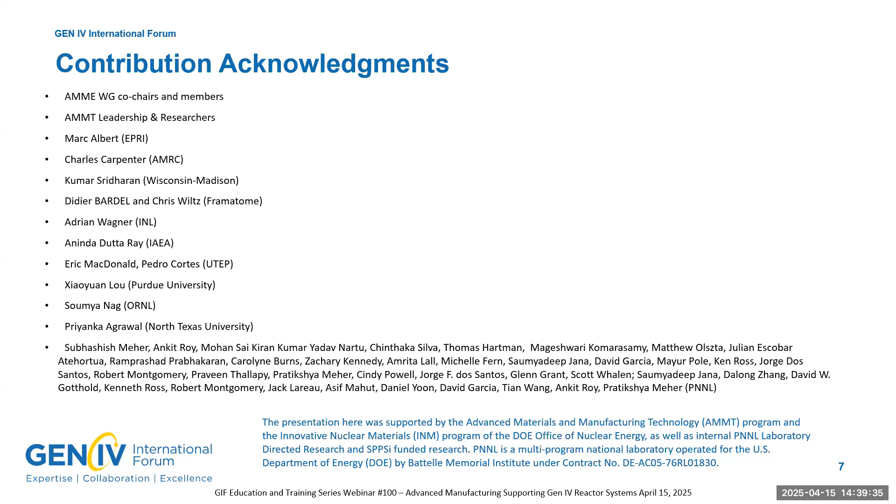There are many definitions for advanced manufacturing. However, it is really the use of innovative technologies to improve and optimize all aspects of the manufacturing process through the whole life cycle, from conception to end of life, with a goal to enhance efficiency, productivity, and competitiveness. It also involves how advanced technologies like robotics, automation, and data analytics are being integrated into traditional manufacturing processes. So we should not only focus on newer technologies, we must really look at the full envelope of manufacturing processes so that we can bring all the newer technologies there.

The US regulator is currently evaluating 5 advanced manufacturing techniques, classified as mature - and I put that in inverted commas, because there is still a lot of research and development, or at least deployment activities necessary from us as a community. Powder metallurgy, hot isostatic pressing (PM HIP), electron beam welding, and cold spray are so-called mature technologies.

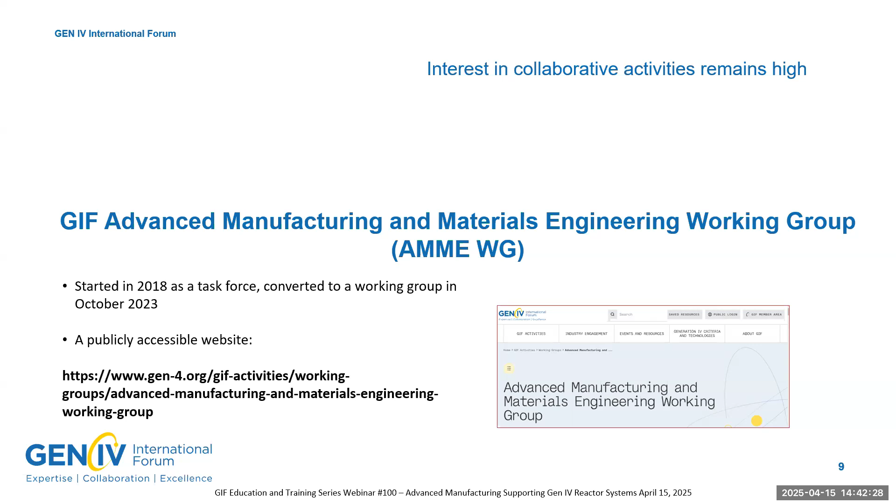A little bit of history of us: we started in 2018 as a task force, and we are very happy to say that we converted to a working group in October 2023. Today I'm going to give you a snapshot about what we are doing over there.

I'm not going to read through this long list of our members. However, it is very important for our global community to understand that we have 17 country representatives, and each one of you can reach out to your country representative to understand how you can become involved and how you can contribute.

Our main overarching objective is to reduce the time to deployment for advanced manufacturing and materials engineering technology. Specifically, we aim to promote international collaboration on the qualification of these processes, because together we can be quicker and faster and better. And that is what we are aiming to do here.

We are frequently meeting, and we are happy to say that in addition to the country representatives, we are open to observers from industry. We are extremely happy to say, as you can see on the slide, that we do have some industry observers available nearly every month in our discussions and meetings, and even ad hoc conversations in between those meetings.

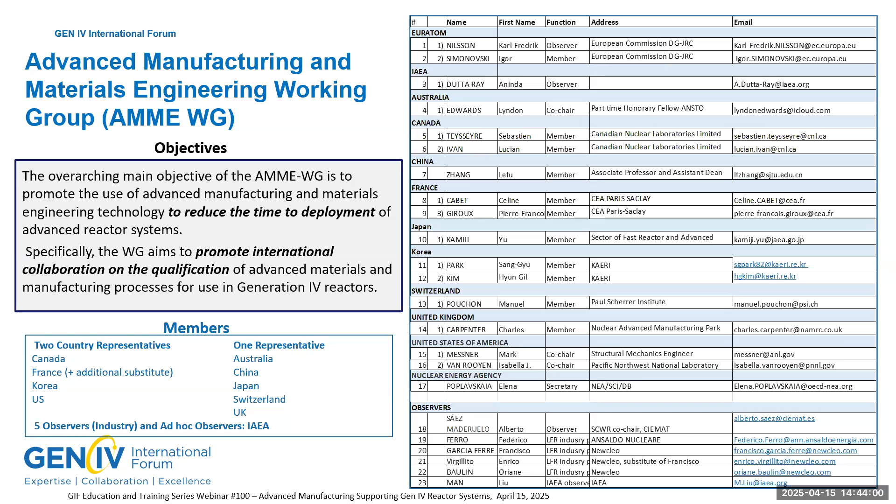Very excited about the activity and action of our teams. Now, how do we do our work here? It is not funded projects in the sense that we are providing funding, but each country contributes to the knowledge base, working together toward higher value added. With that, we have divided into 4 task groups, and we have 3 co-chairs: myself, Mark Messner, and Lyndon Edwards.

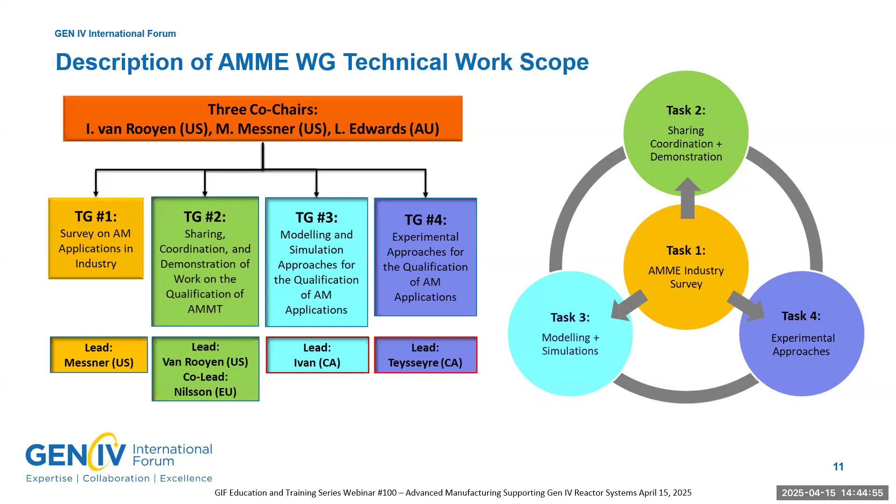Task 1 is the industry survey, because we are here to serve the industry, to help the industry, and to do priority work, what is important for them. Very importantly, we have done 3 surveys already through the task force time and the working group time. The industry behavior really changed, I think in 6 years, from reactive to proactive.

Very excited to see that industry are joining hands with all of us and understand or experience the urgency, and therefore we need to go further.

So what materials are they interested in? Steels, or iron-based materials, are still the highest interest, and they are focusing more on traditional engineering materials for a variety of reasons, because more information is available, more material, more supply chain is available, and therefore the risks are perceived to be lower. However, the interest in ceramics seems to be increasing relative to metals, but metals are still by far the most interesting topic.

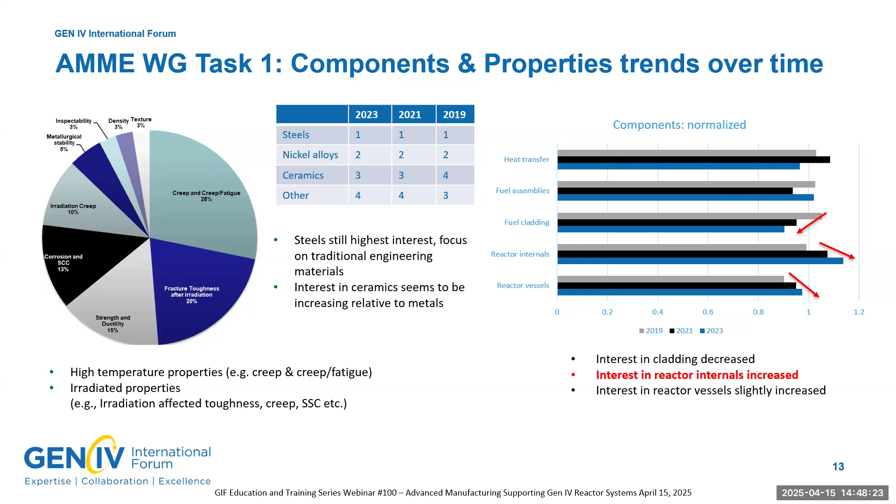We have also seen a slight change in the components that industry partners are interested in, with reactor internals becoming of higher interest. The interest in cladding decreased, but it may be an artifact because the community is starting to understand that this specific working group of ours is not focusing on the fuel meat itself, the actinide type of manufacturing. So it may be an artifact, but we don't have enough data to confirm that, so I think it is not at this moment a real big surprise.

However, we also see a big change if we look at the manufacturing techniques that the industry stakeholders are interested in. You can look at the blue bars here, and I've highlighted the three biggest changes with the yellow block. That shows that directed energy deposition processes have received a drastic increase of interest, as well as PM HIP, and advanced welding, which from day one, when we started these surveys, was the highest interest. All this shows the possible trend toward large-scale manufacturing and integration of systems.

So really, industry now wants to construct, fabricate, and build the systems. It is not only anymore on the component or material level, showing that it is really an earnest need for us to look at the full life cycle of that material.

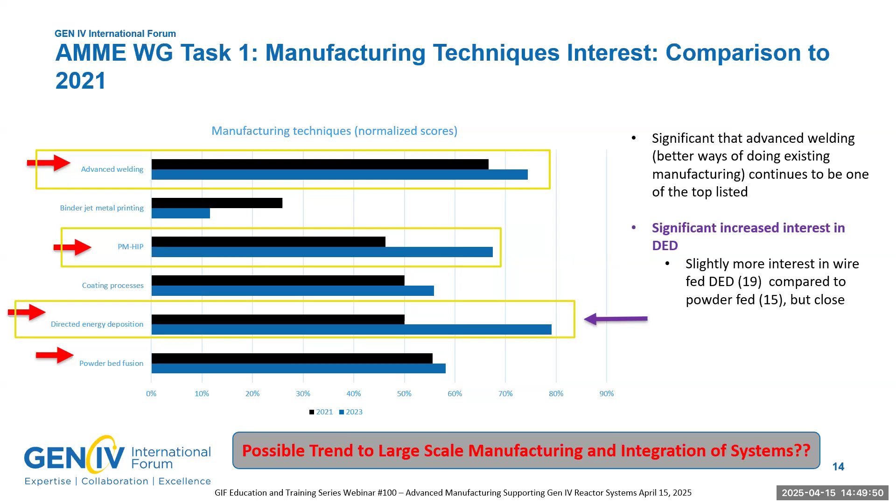A little bit on the directed energy deposition processes - it includes both wire-fed DED as well as powder-fed DED, because each one has a specific niche of components that we can do.

Now, let us talk a little further on how the information we have received from task 1, the industry surveys, is feeding into tasks 2, 3, and 4. Task 2's main objective is the sharing, coordinating, and demonstration of our work on qualification, because it doesn't help if we are all excited about our topical area but we are not showing the world what we are doing so that it can be useful for them. It doesn't matter if it is in research and development or what technology readiness level you are at or what level of commercialization you are at.

Our purpose here is to share what we have available globally together. There are specific activities there. I'm not going to work through that now in this presentation, but you are welcome to reach out to us for further discussion. We do have a specific technical task aimed at the feedstock powder, and we will get very soon into that activity.

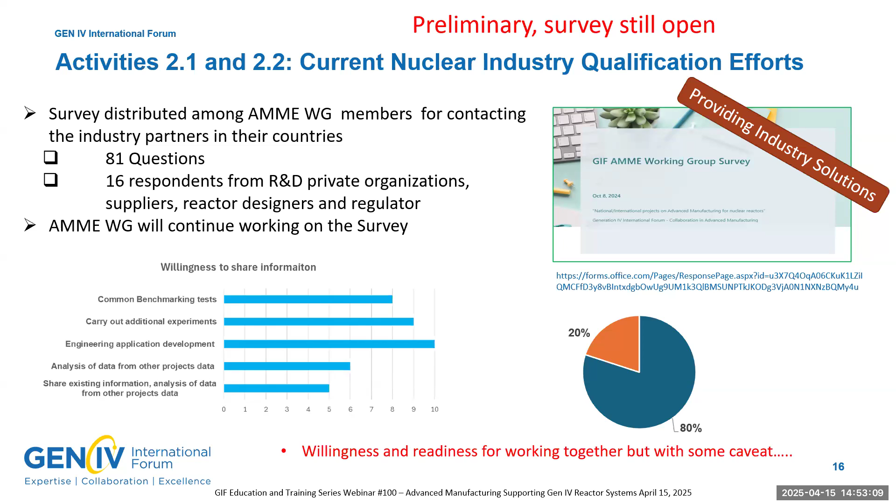I have not included all the information we've received, but significantly, most companies are working on material and component manufacturing, and the testing technique used is the standard test. There is some accelerated testing done, but because of the risk, time for development, and urgency, focus is on the standard test. That opens up the need and opportunity for the research and development community to focus on accelerated testing methodology and get it into the codes and standards.

On the qualification approaches, predominantly just a little ahead of the model-based and statistical test method is still the equivalence-based approach, still equivalent to our more conventional manufacturing methods. That is not wrong, however it shows the tendency that we are still not designing for the newer techniques. Hopefully in time we will get to that point so we can fully reach the benefit of that.

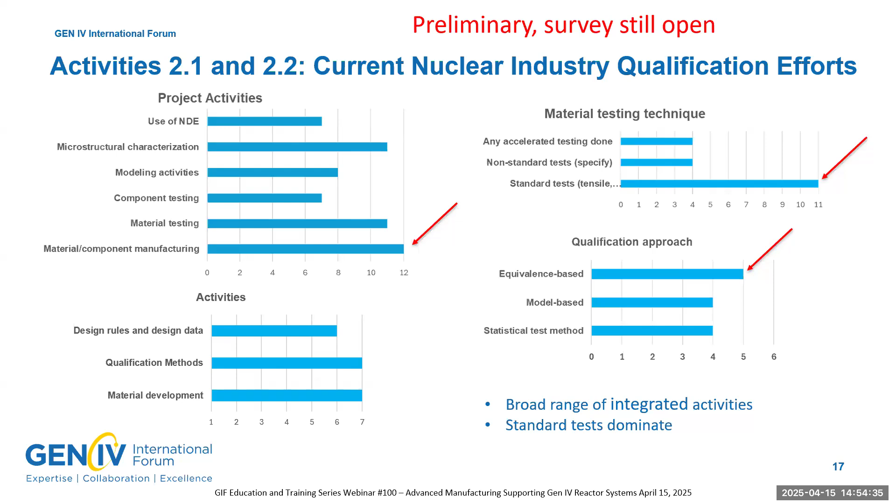As part of our obtaining and learning from other industries, part of task 2, we had this additive manufacturing industry perspective panel during the recent TMS, where we covered aerospace manufacturing as well as nuclear providers and developers. All of them had similar needs—not concerns, but similar needs. It doesn't matter which industry we are in, we can join hands and learn from other industries, and then just address the specific, unique opportunities that nuclear brings us.

I am willing to share some more input on that. We haven't written our report yet.

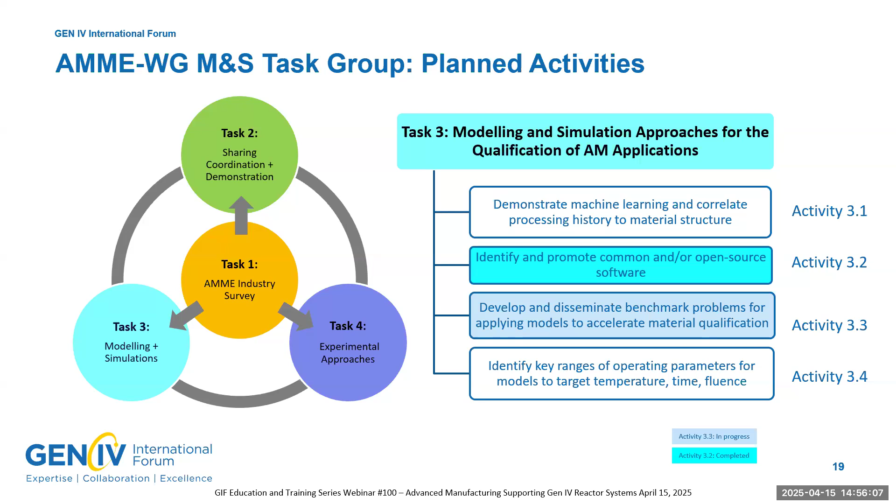Task 3 is modeling and simulation approaches for the qualification. How can we use modeling and simulation to accelerate qualification, or at least validate, or decrease the number of experiments? So really understanding what open source software is out there, and how we can apply these to accelerate manufacturing qualification.

The team has done excellent work. Currently it's only an Excel-based database, and we are busy testing it internally in our working group. But as we grow in maturity, we are willing to make this available, covering a variety of manufacturing processes, with use filters, availability, and detailed references.

One part of this work will be presented by our Canada member, Lucian Ivan, at the coming June 3rd to 5th at the US Nuclear Regulatory Headquarters in Rockville, on technical approaches for qualification and through-life performance. So this will be our test case, and from there we hope to do further benchmarks going forward.

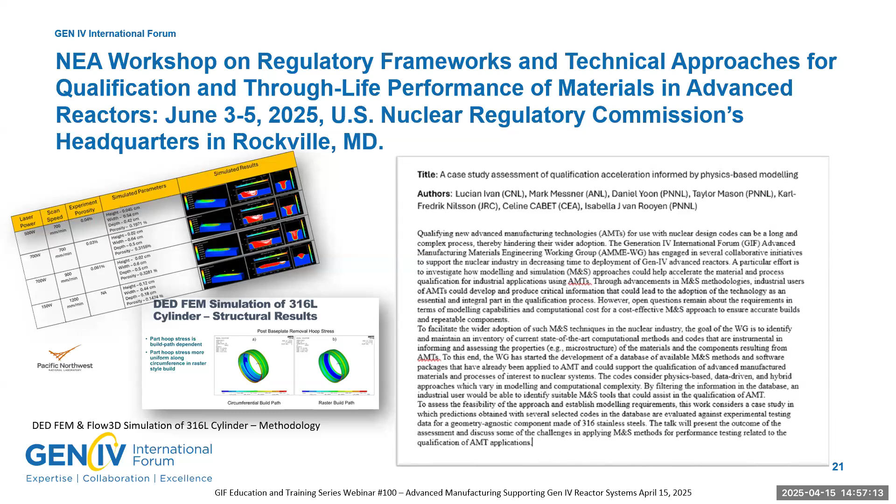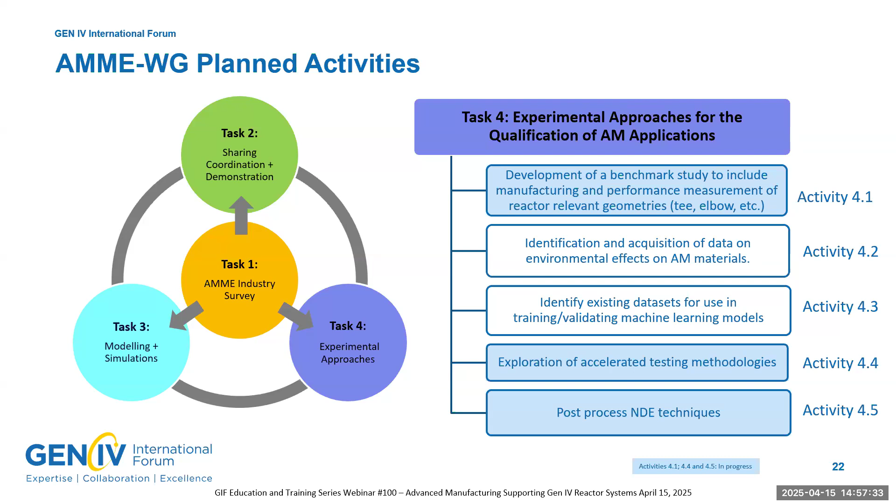Now task 4 is the experimental approaches, and obviously we want to understand from our survey what we need to focus on, and how do we link it with our modeling, and what data is already available within our members that we can further continue with.

So to overcome possible proprietary constraints, we have designed a potential expanded elbow geometry benchmark design, as it provides opportunity for pipe sections at different angles to be built. As a case study, we are focusing again on 316 variants, as that is identified as the material type used by many material developers.

And we will look at powder DED, laser powder bed fusion, and possibly wire DED to a lesser extent. Later on, we would like to expand it into nickel alloys as well. And yes, you would say it's really not the most fancy geometry.

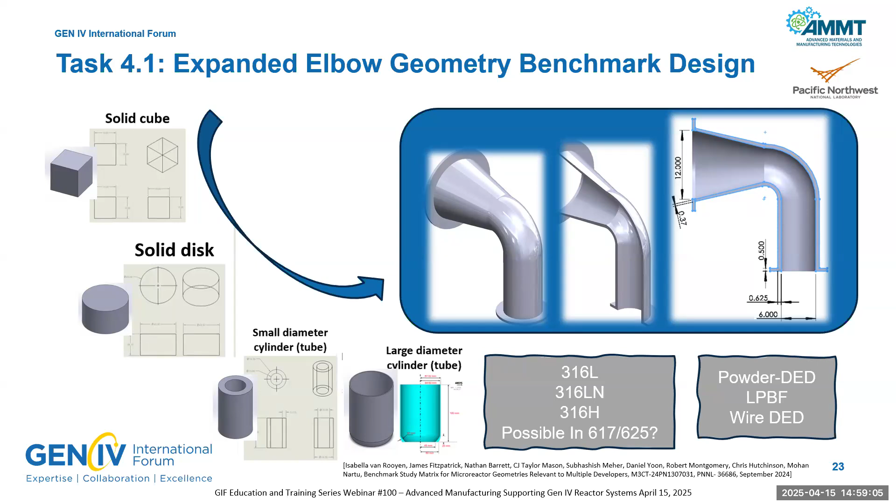That is an advantage of additive manufacturing. However, this is one aspect that we think most industry partners and developers will use: some tubes and piping of sorts, both in-core and out-of-core. And that's why this is quite challenging. It looks simple, but it's quite challenging to build in the different processes.

Now, a lot of work has been done, but just some highlights - I have not even included all the countries' contributions here - but some builds were already made in geometry, and a benchmark study and sharing of information is now in process. You can see for each material type at the bottom, we will develop a shared benchmark study. There is already some country reporting on the geometries, how we decided, and obviously some modeling has been done, very early stage modeling as well as characterization.

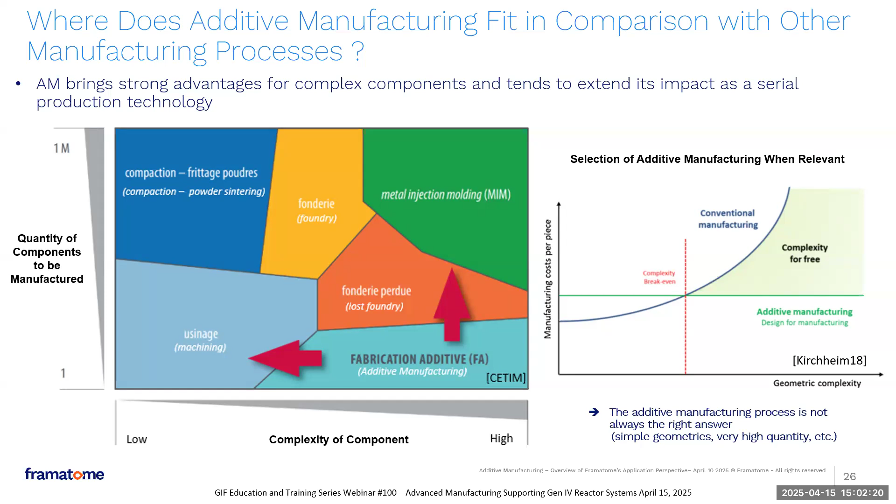Moving forward, here you can see from their perspective and industry's perspective that there is a variety of additive manufacturing processes. And for each one of us now to decide what we are going to do, why we need to do it, we really need to understand the property-manufacturing relationship. In other words, what is your end product's requirement? And then, by having the technology knowledge of these processes, what will work well for you.

And this is what Framatome did, focusing here on, well, what is it, two, four, six, seven manufacturing processes. I'm sure by now you have started to hear a lot of the same terminology. So WAAM, for example, is wire arc additive manufacturing, or otherwise similar to wire DED - slightly different technologies, but falling in the same family.

Then there is also plasma arc transfer, which is a layering process, similar to cold spray, and then hot isostatic pressing. Here you can see again the effect of geometry complexity versus size, with hot isostatic pressing, WAAM, and cold spray more listed in their evaluation for their actual needs. And also, on the right-hand side, you can see the enormous primary circuit elbow, and then also the need for multi-material assembly. We have a few examples of that going forward.

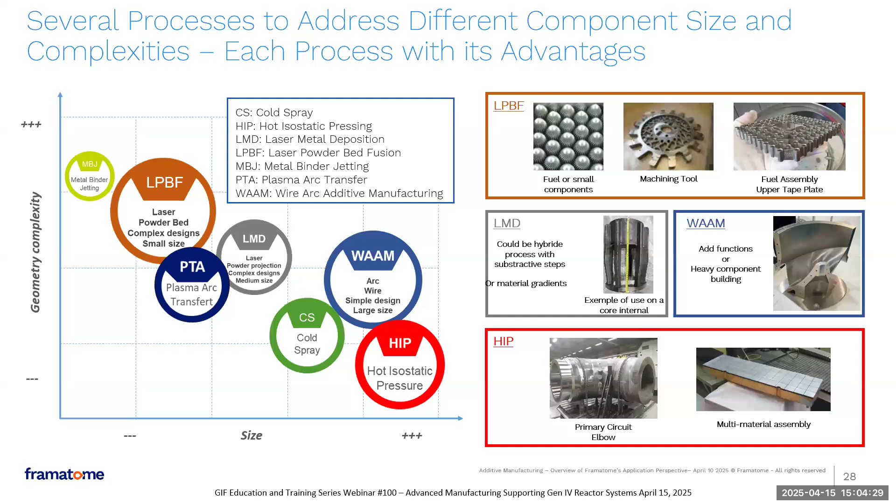With this, they have decided that their current interest is on laser powder bed fusion for their specific needs currently.

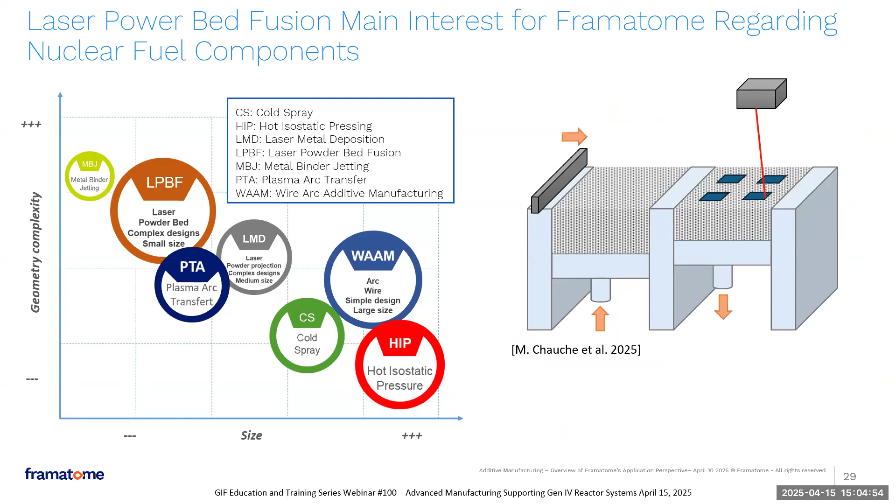Okay, there's a little simulation there, so thank you very much. I'm sure some of you know this already. And with that, then we are moving to the joining and welding technologies. I think I must work a little bit faster here.

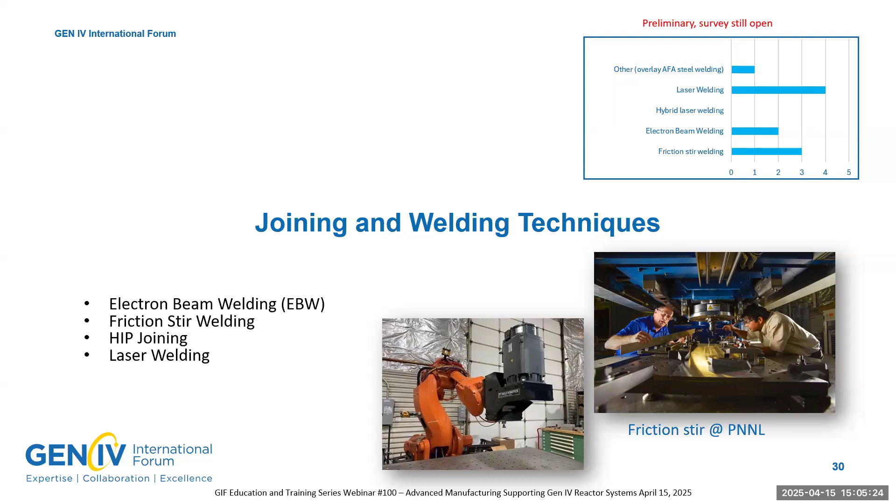Again, if we look at the preliminary survey of task 2, it shows that laser welding, friction stir welding, and electron beam welding are of interest to the respondents up till now, and therefore we will give some information on these. Now, electron beam welding can really make very high integrity components and also extremely large components as well.

And EPRI together with AMRC really did very good work on this section welding, and they used the NuScale Power project, and it was a US DOE project managed by the AMMT program.

So I forget now the actual decrease in welding time when they switched from gas TIG welding through to electron beam welding, in addition to all the other technical aspects. But it is tremendous. It is from months to days. So it is extremely important to understand the size of your component, your integrity, and obviously your equipment available.

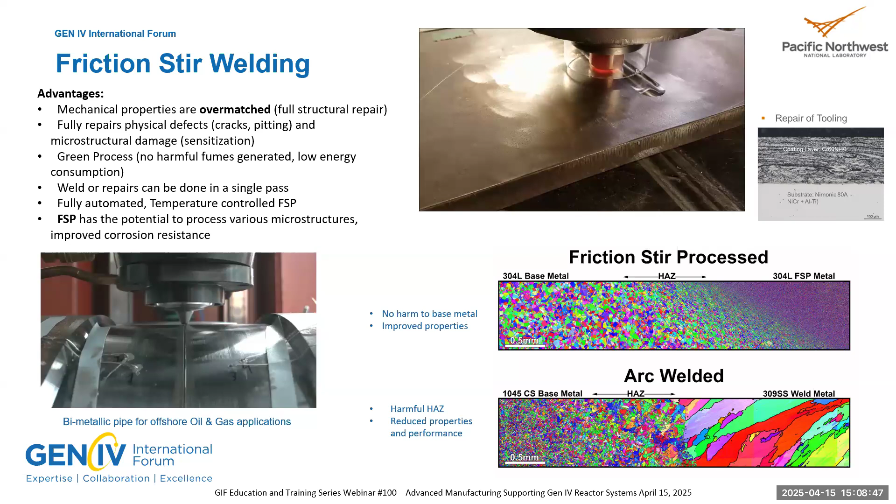Now, friction stir welding can also potentially be autogeneous - don't need any filler materials. The video is running in the background there. And on the right-hand side, we can also understand and see the metallographic differences. It can be very much automated as well, for both lengthwise axial and circumferential welds.

This is actual work that has been done at PNNL and many other places can do that as well. But the benefit really can be seen that there is no harm to the base metal, and it does have improved properties. Also, weld repairs can be done in a single pass, fully automated, you can control it very much, and then you can have various options.

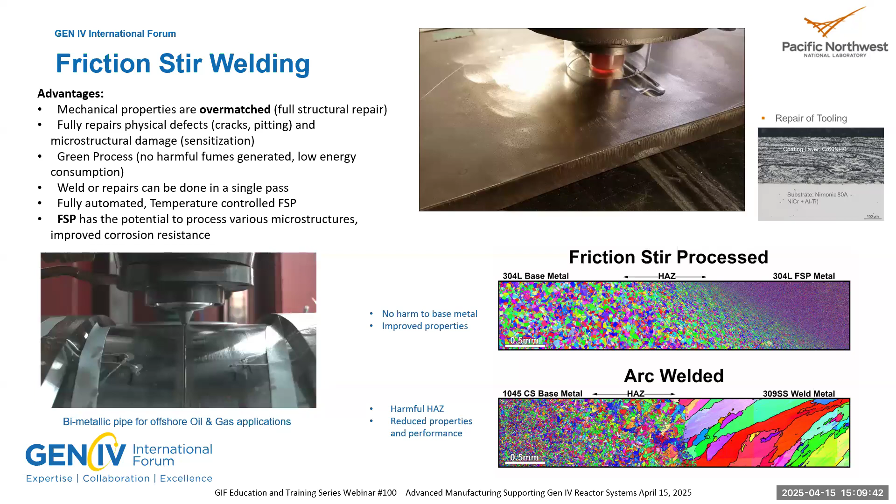Okay, let's focus here on contributions from Purdue University, where they really have a very interesting research project with very nice future applications. It is a combined project showing hot isostatic press as a joining technology, as well as cladding technologies, or the effect of cold spray clad and then HIP capsule diffusion bond. So a variety of joining technologies. It's quite a busy slide here.

However, the biggest information we want to get here is that we do not need to limit ourselves on what joining techniques are available, and we must think about how we can integrate a lot of manufacturing processes together. We can also do graded joining by HIP, as they used in this case study with SA508, different material manufacturing types, but also with different manufacturing types as I mentioned above. And here is some microstructural advantage on the step-by-step approach.

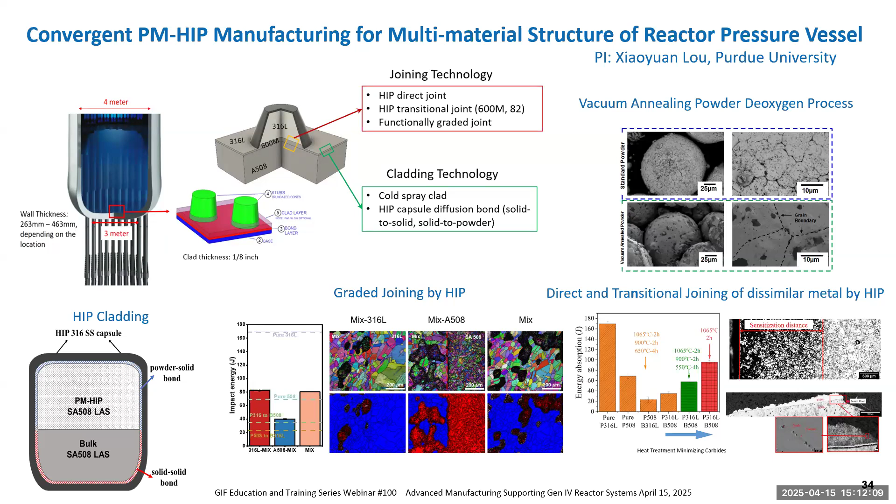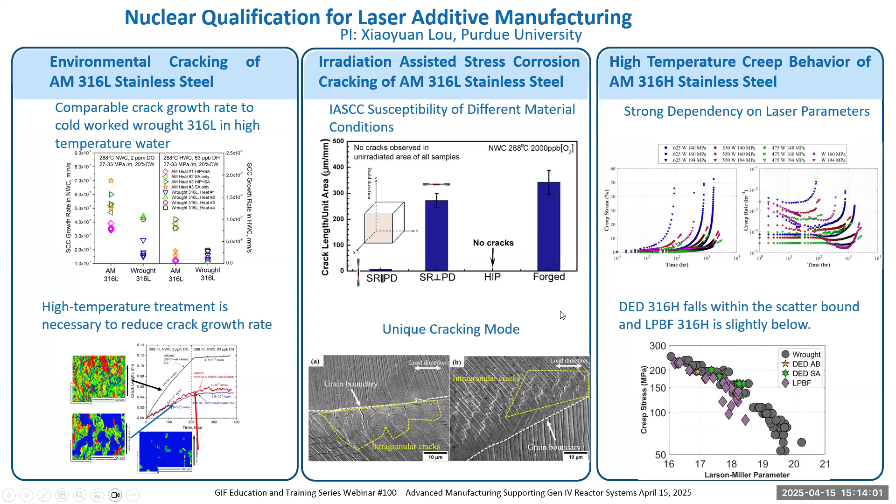So in other words, we are very close to understanding, or on the road to understanding, what is happening, and also once you have welded the material, what is the effect on the corrosion resistance? How does that influence it? Because it is not only the one parameter or property we need to combine, but multiple properties we need to consider.

Now, for large-scale manufacturing, I've already talked about hot isostatic press, but we must not forget other manufacturing techniques, including forging. I have not included this, but there is still a very large place for conventional manufacturing methods. We are not replacing them at all, and we need to understand where we are going.

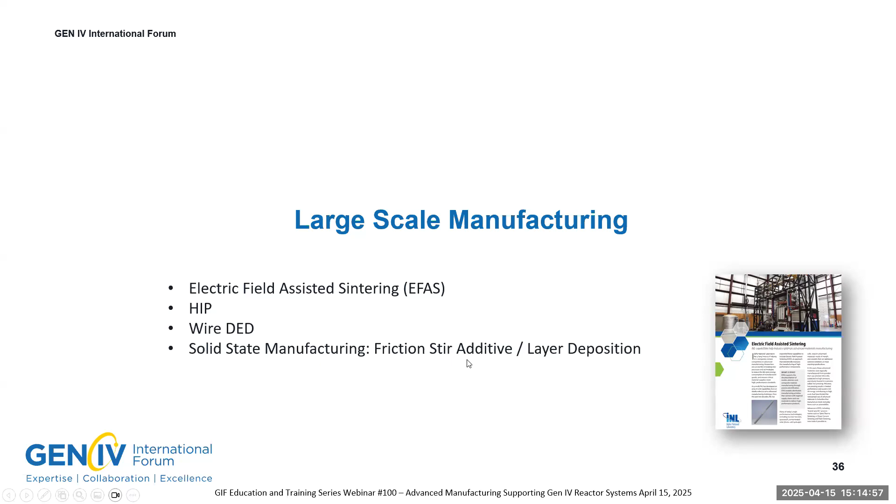But I want to highlight electric field assisted sintering, because maybe not many of you know of the large facilities already available, since many of us just think of it on the laboratory scale. However, there is commercial scale available, and I will provide some information. I will also give you more information about friction stir additive or layer deposition processes here.

So INL has a very nice system, a large format 800-ton press that can provide sample sizes from 8 to 24 in diameter. I urge you to read more on their website about their facilities. This is also a sinter process that is more energy efficient, so it is something for us to consider using in the future.

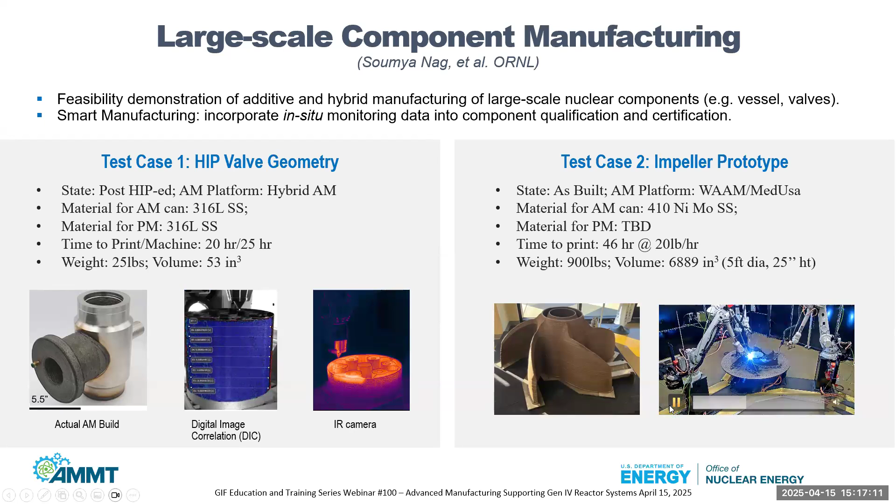Okay, with this, let me move on. I know there are too many nice videos for us to look at, but now let us look again at friction stir additive. Friction stir is a solid phase manufacturing process, and it can also be used for bulk manufacturing.

Here is an example of a specific high entropy alloy of very high strength, which we have done for the first time using this technique. The solid phase manufacturing process applies high shear strain during metal synthesis or fabrication, and it produces high performance microstructures, semi-finished products, or engineering assemblies without bulk melting of the materials. This is important because now we can potentially have a different manufacturing process for materials that were very difficult to manufacture before, or that have problems with segregation during casting or the melting profile.

Generally, additive solid phase manufacturing is focused on three solid phase deposition technologies. The first is friction surfacing; you will see quite a number of terms in the literature, and we try to simplify it here. Then there is friction melt, which uses the tool shoulder and is more effective for layering and depositioning, among other things, but is otherwise fairly similar to friction surfacing. And then you have friction stir plate stacking: if you are in the field or have plate supply available, you can build your bulk material up and still have quite interesting features, as shown in those examples.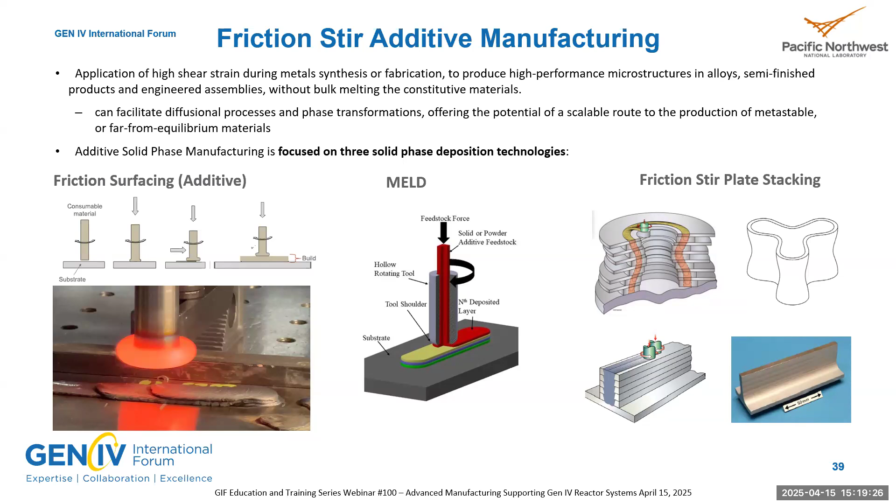Okay, let me move on. Here is early research on high entropy alloys. With high entropy alloys, as you may know, many applications and market entries are limited because of the lack of a bulk manufacturing method. We have started research using friction stir layer deposition on the microstructures of these alloys, because in addition to microstructural advances like significant grain refinement, it is also possible to make bulk material of the HEA, which we hope will bring it closer to demonstration and application. Here are the two material types that we have utilized.

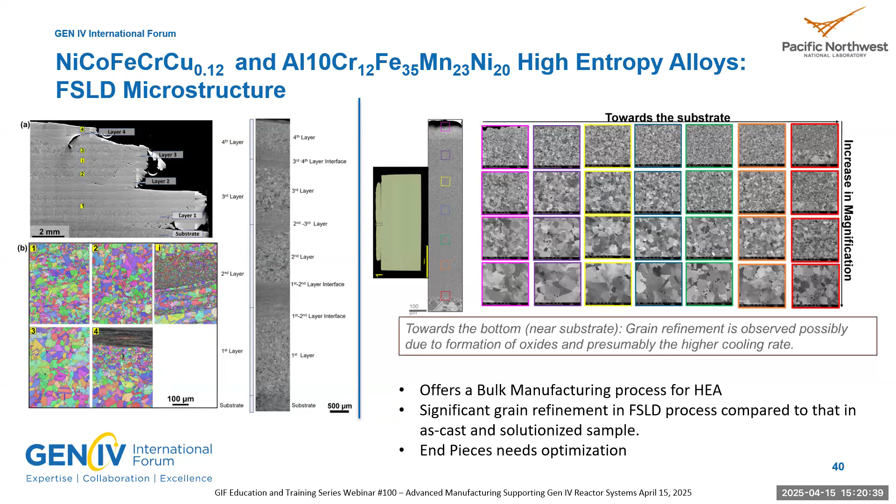Both alloys have been indicated in other literature as potential candidates for use in nuclear energy. Excellent work here from Dr. Agrawal from UNT, North Texas University, showing—and the reason I show this here is that although we have discussed a lot of manufacturing technologies, not all the knowledge is there already on their radiation tolerance behavior.

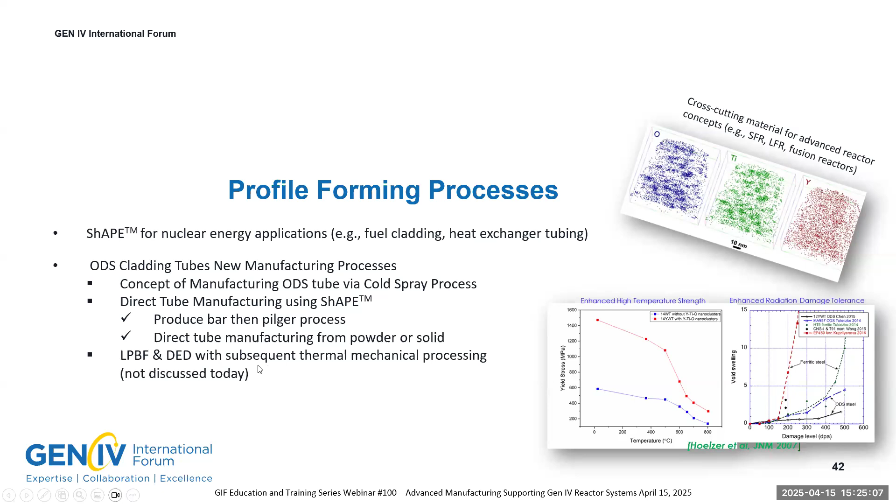Really, one or more of these can be more economic, viable, and repeatable, so that it can be qualified. I am not discussing the additive version of the work that the AMMT program is doing specifically—we'll leave that for a different time.

It is too much. So the ShAPE, as I mentioned, is developed at PNNL, and it is a solid phase manufacturing process—shear assisted processing and extrusion process.

There is a little video showing a rotating die pushed into the billet material, resulting in the fabrication of extrudate between the mandrel and the orifice, or the landing. There is a variety of designs, a variety of materials, and in all the tooling design there is a big material component as well.

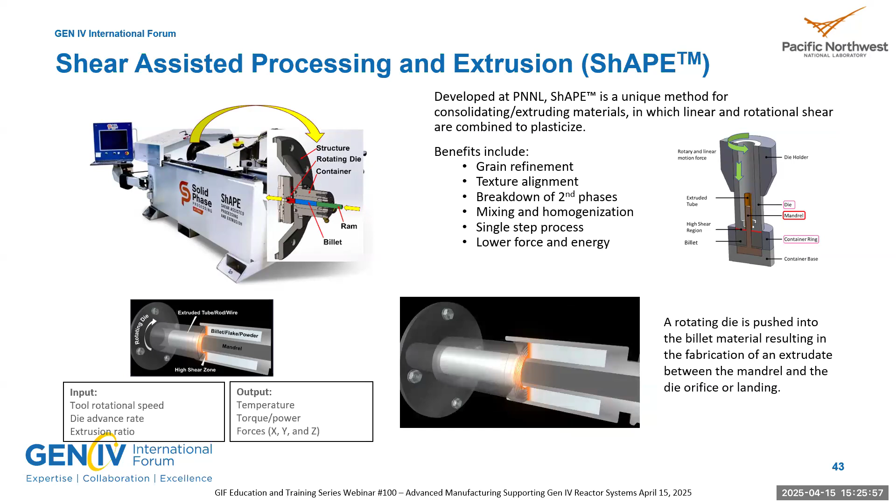This allows an opportunity for a variety of profiles—not only round tubing, but also square, asymmetric, multi-cell. Obviously not all material types have reached the same technology readiness level, but we are working on higher strength, higher temperature materials as we go along. It was initially developed for the automotive industry, and we are glad we can transition into higher strength and higher temperature materials as well.

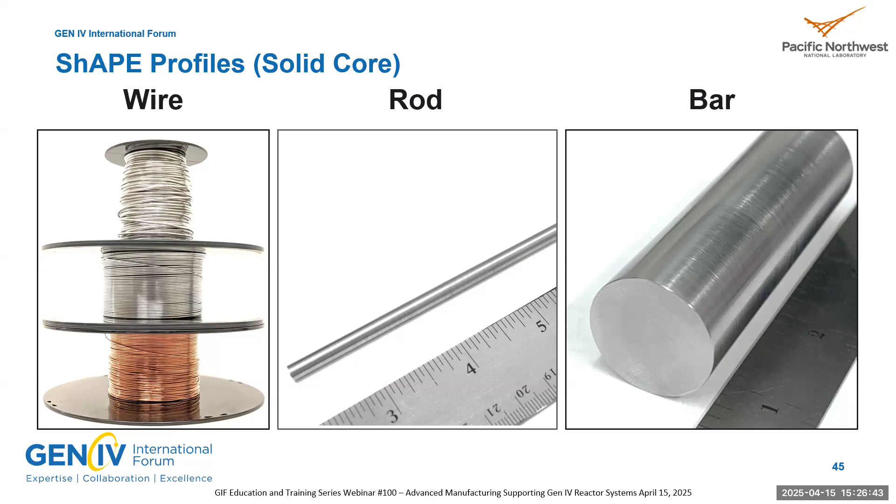You can see here you can do wire, rod, and bar, which also provides opportunity. Of all the research, I wanted to highlight this because it's relevant to nuclear energy, with zircaloy tubing. It was LDRD work, but it also shows the possibility that you can have cladding simultaneously inside or outside, or both.

And have very good equal thickness. We have done more work now on ODS materials for direct tubing. I have not included it here, but our paper is in the final stages of review, addressing this, so that information will be available soon. However, here again you can see the difference in grain sizes from before and after—a significant grain refinement—which provides a very good opportunity.

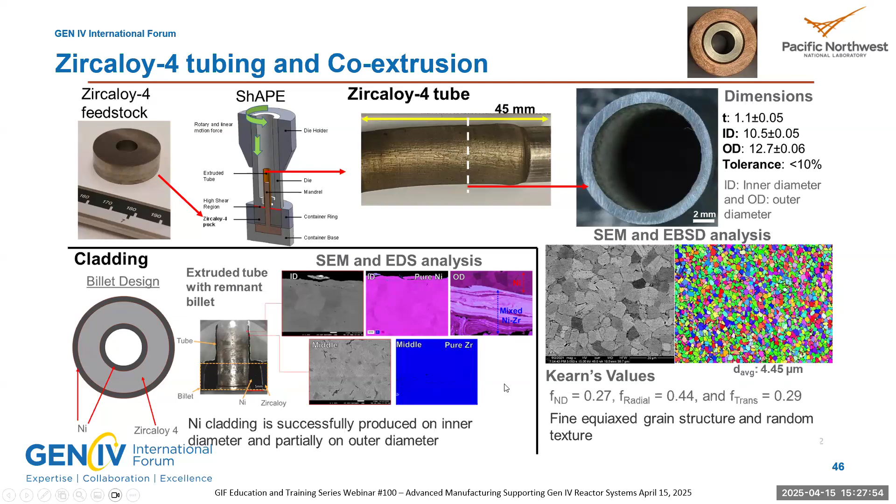We are currently busy with other HEA alloy work for fuel cladding, very exciting work. Now, why do we look at other manufacturing methods for ODS specifically? That is because there is such a lengthy conventional manufacturing process. It is working, but we really want to be more cost effective.

There is a high cost, and there are so many parameters that we need to monitor to be able to go through this process, that we really want to explore some more commercial processes.

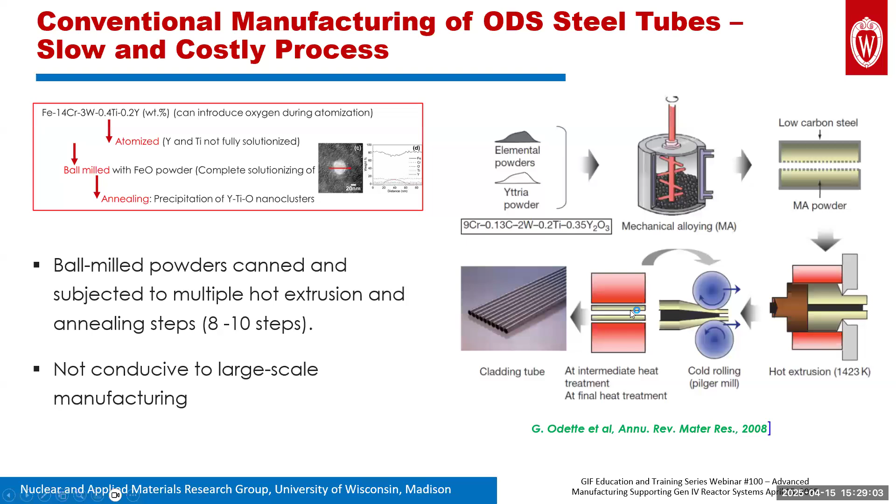Some of the ShAPE processes can eliminate steps until here and still do pilgering when you have the bar, and then the pilgering, or if you can do directly from powder into your tube manufacturing process, as I showed in the previous slide.

Very exciting as well is this patented process from University of Wisconsin-Madison, where they have again eliminated multiple extrusion steps, making use of cold spray, where they use a sacrificial or removal substrate, and then do a thermal treatment of the freestanding monolithic ODS cladding.

This is exciting work. It started from a university program funded by the Office of Nuclear Energy, and it is very exciting. Obviously, there's a lot of science and engineering involved, and I did not show everything here, but it's very nicely written down in some of the references.

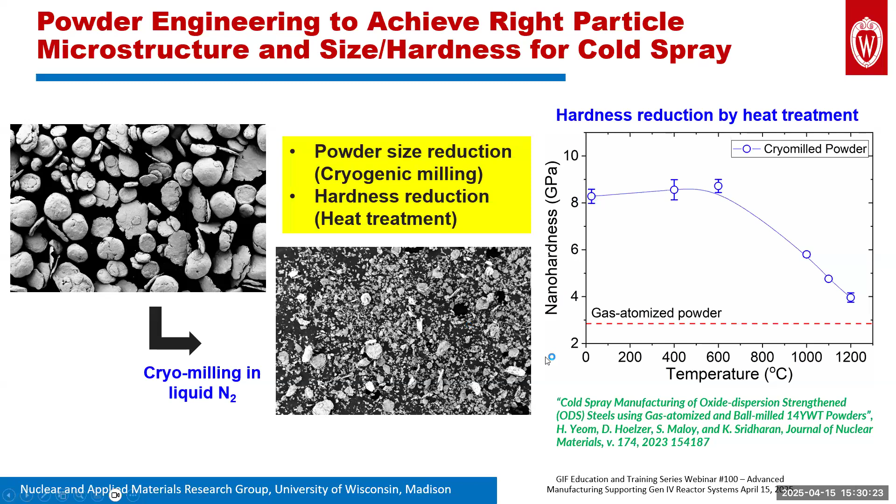Because you need deformation on the surface, you need to have engineered very nice hardness for this specific alloy and material. Therefore, hardness reduction of the powder was necessary, and that is the research around that.

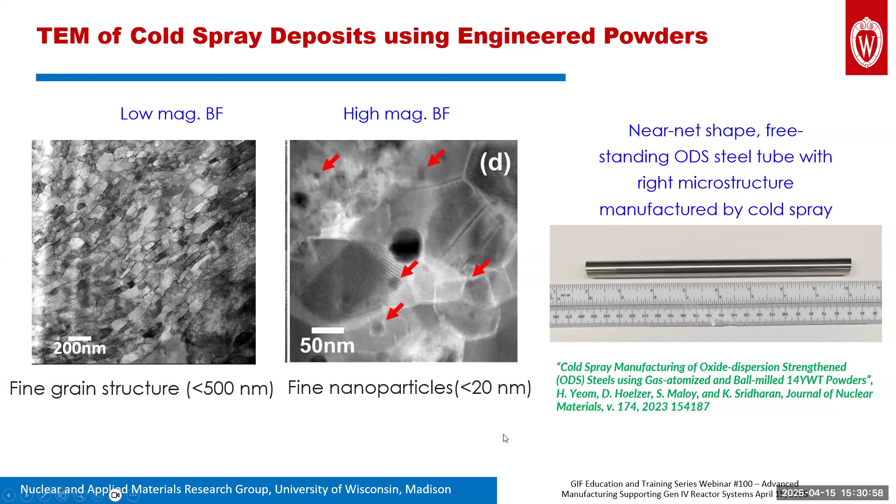So Cold Spray is not only a layer technology, but here it's used uniquely for a new manufacturing process. Here is one example of the work at PNNL on the bars.

So also as a cost saving opportunity, we really hope that at least for tubing and ODS, we can get a process soon.

Here is a very excellent microstructure of Cold Spray processing. And the black there is not cracks, it is just very fine grains.

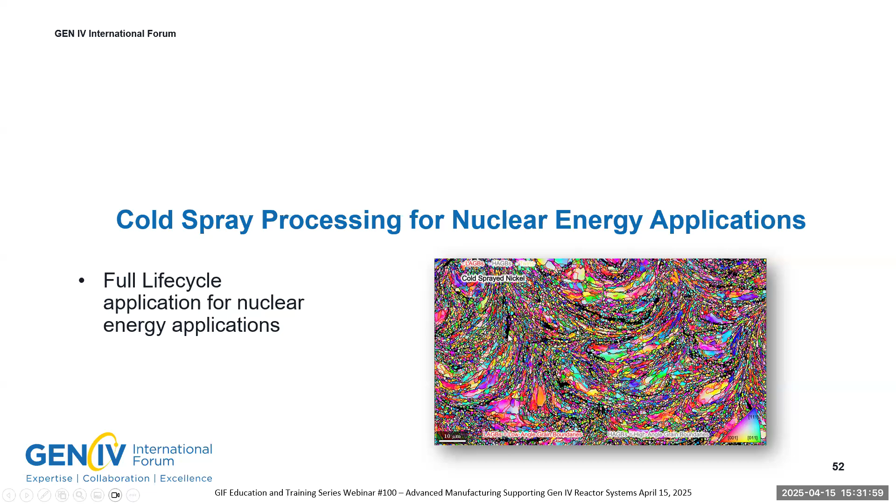As I said, Cold Spray can be used for the full life cycle. Here is some simulation of the particle deformation, and because it is on the surface, again, it's not a melting process. It's also a solid phase manufacturing process, with no heat affected zone and no tensile residual stresses if you develop it correctly.

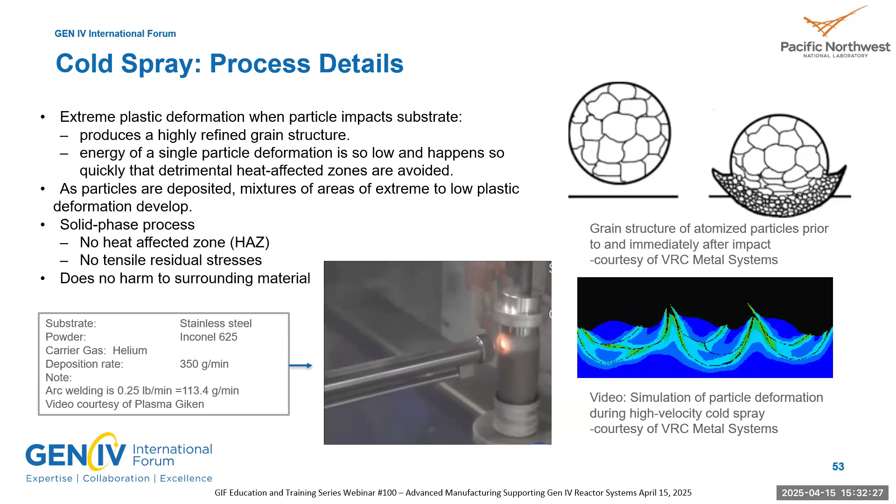It can also be why it's so used for repair, because it can be easily taken to the field. Here is, however, an example of why we must not ignore the other areas.

We can use it for rapid screening of alloys. We can do new designs to include it as a designed environmental or corrosion barrier. It improves the economics. Generally, up till now, it is more known for improving the performance and economics, or the life extension or the in situ repair.

But it can also be used for some of the new sensor applications for life monitoring, so the life extension of that. Here on the right-hand side are examples of typical problems.

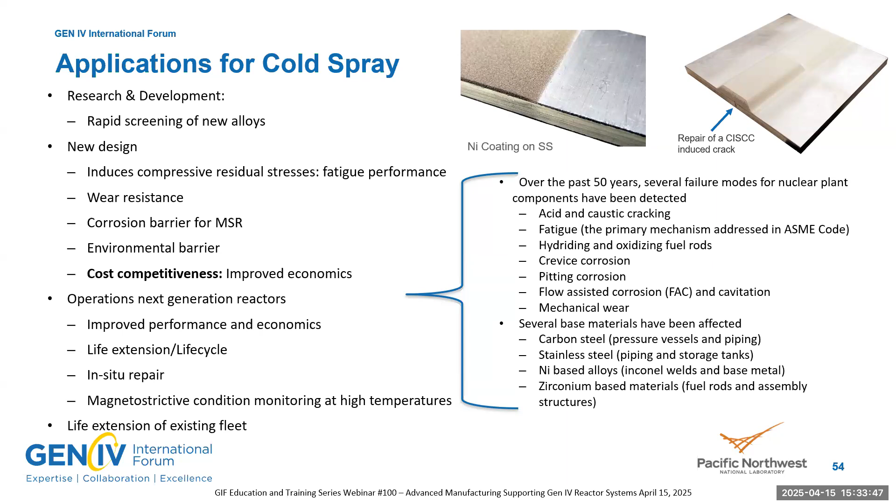It is in the light water reactor, but we as a Generation 4 reactor community really must look at this in relation to our own designs, and then already prevent similar defects from taking place.

Here is one example of the before and after, where Cold Spray was used in the light water reactor community together with various industry partners, which we are very happy about.

And then Westinghouse also used chromium with Cold Spray for their optimized ZIRLO design, and it has been irradiated now here.

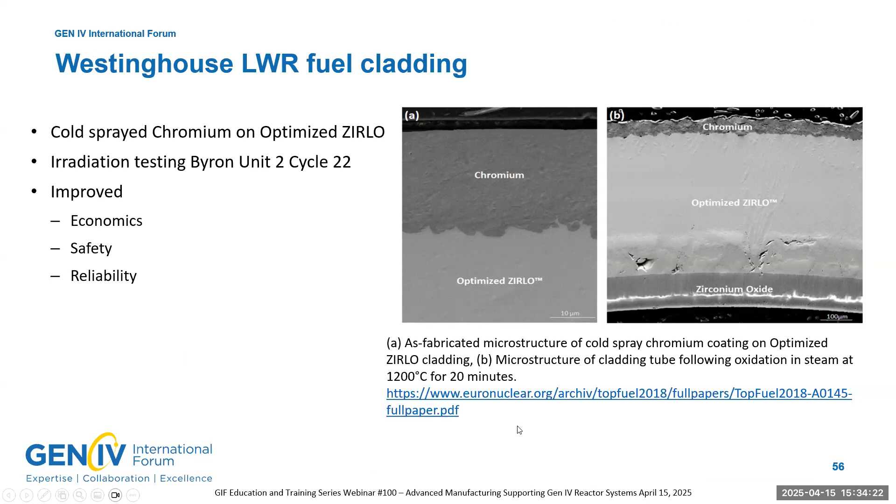Then new techniques or applications. So sometimes, working back from what is your requirement, what do you need? You may not find the ideal manufacturing process, and therefore you need to integrate or use little bits from different manufacturing processes.

So I urge all of us, let us be more creative in what is out there. However, we do not need to reinvent the wheel in most cases. In most cases, it is understanding what is available and what we can do.

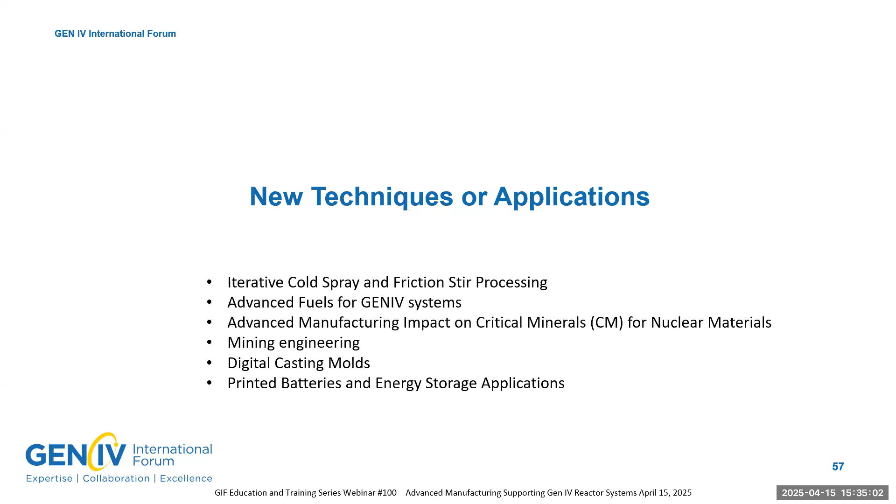One such process is iterative cold spray and friction stir processing. Again, here for iron ODS plates, there is really an opportunity for us to produce some plates with a very fast general approach, with extremely nice nano oxide precipitation there, and also increased properties as well.

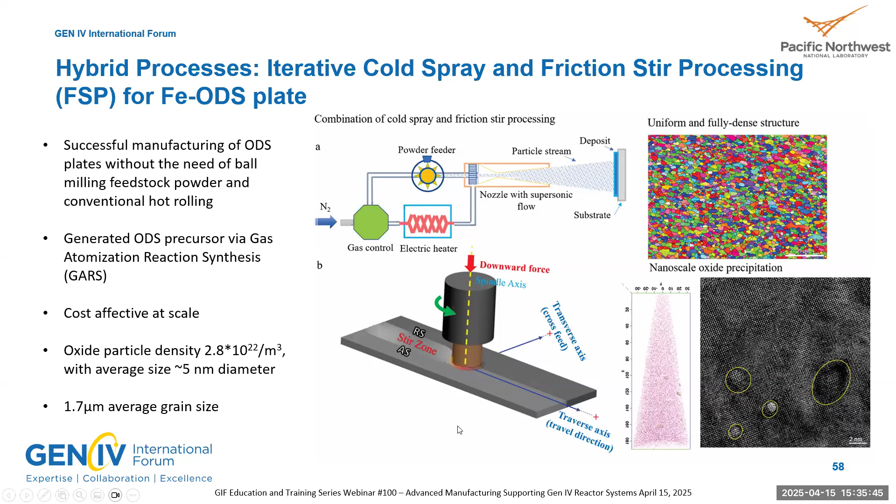I don't have the reference here, but I believe literature will be coming out soon if it is not already out. We have done, as well, as part of the AMMT program, work with powder sizes that we had available.

So it's really early research. Conventionally, it is not the ideal powder size distribution that we need to use for cold spray. However, after that, we have processed the region with friction stir processing and still achieved very nice finer grains, as you can see from left to right.

Obviously, this is early research, and we need to do further work on this, but this provides another opportunity for us not to be so sensitive to the supply of the powder, because there are other opportunities for that. Now, a little bit more exciting for those of you working in this field.

Adrian Wagner from INL provided this information. I'm very excited about it. Obviously, if we look at the sintering and the EFAS processes and other diffusion bonding processes taking place, you can still do your gradients and different materials and continue. There's still a lot of room for improvement and control there, or initiative there.

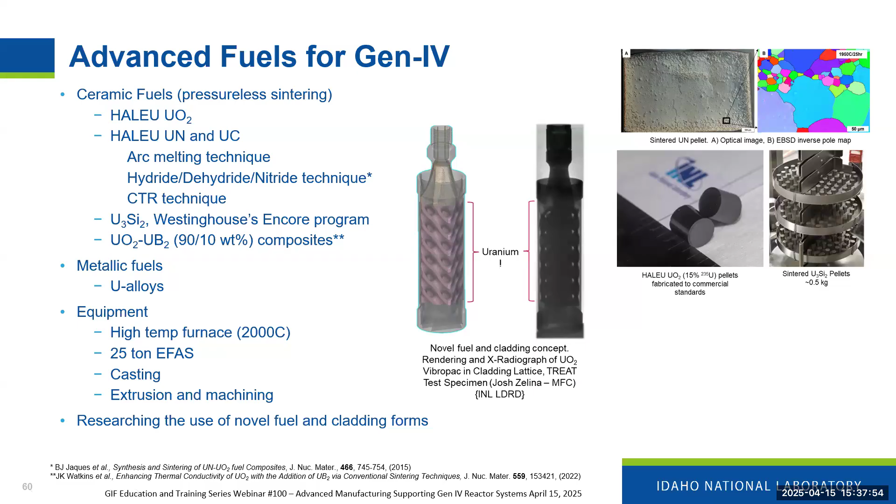However, if you really look here at the INL LDRD, where they have used a novel fuel and cladding form that can really be done with your additive manufacturing processes. It's actually very exciting to have this cladding lattice, not only for metallic, but also for your fuel material. Very exciting work.

Now, a topic that is very important for us, and I think more of us need to start to think about for future material development, but also for our current manufacturing processes, is the scarcity of our elements and alloying elements in the common normal alloys that we are all currently using. So the PNNL team looked at, for the AMMT program, all 50 minerals that are critical for nuclear energy.

This table here really shows, in green, a very quick overview of which of the elements on the critical minerals list are available or used in some of the alloys for all our reactor types. And obviously you can see here the message is that all our elements are being used.

Now, I have not included it in this presentation, but cobalt and nickel, especially cobalt, is one of the most critical alloys. And therefore we, as a team, looked through the lens of advanced manufacturing at what the impact is and how we can decrease the use of that material. We have divided it basically into two categories. I'm sure there are more, but for this study we have done two.

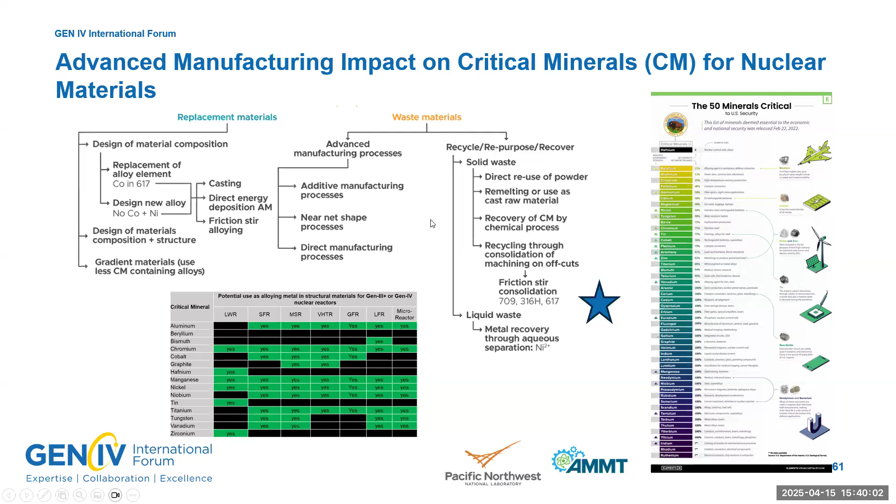Replacement material - how can we replace that alloy through the design of your material? We have focused on that using three manufacturing processes. And then waste material - using advanced manufacturing processes from the beginning decreases your waste, or if you do have waste, how can you recycle it so you can reuse it again, and it's not totally waste. It makes your economy of scale better either way.

Here was one way we have used friction stir consolidation as a means to save the minerals, and this is really what we show here. You can have a circular process. Here is the conventional way.

You put the offcuts back into your casting process, or you can continue and either consolidate it for that same alloy, which we have done with a 709 iron base as well as a nickel base, or you can do alloying during the consolidation process to make a billet, a tube, a bar, or wire, and then continue with other manufacturing processes.

So this was really some of the first, if not the first, high strength materials that we have friction stir consolidated. It has been done in aluminum alloys before, but we are very proud to say we have done it already here - a big opportunity.

Now another one, still on rare earth, still on the scarcity of the material - there's even early-stage work, as UTEP mentioned, on direct digital metal fabrication, where they now have a new undergraduate program in mining engineering to help be more efficient with rare earth materials and manufacturing processes.

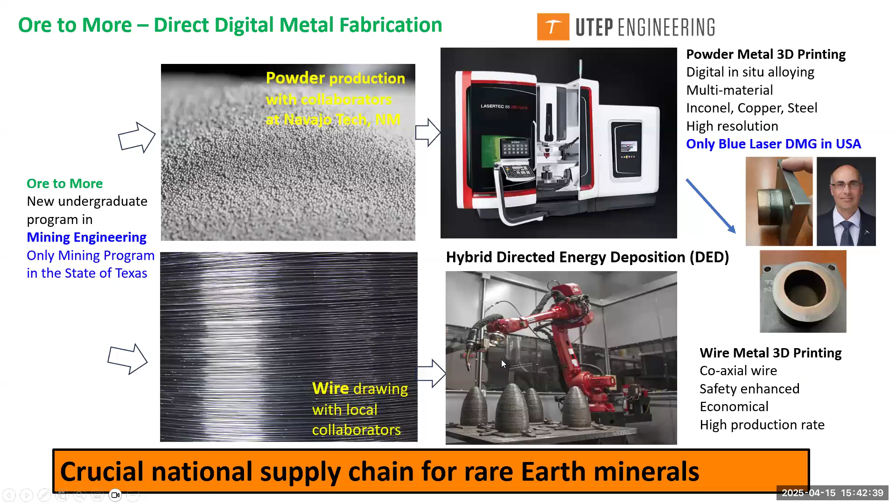And then obviously they are also talking about wire metal 3D printing and the high production rate there.

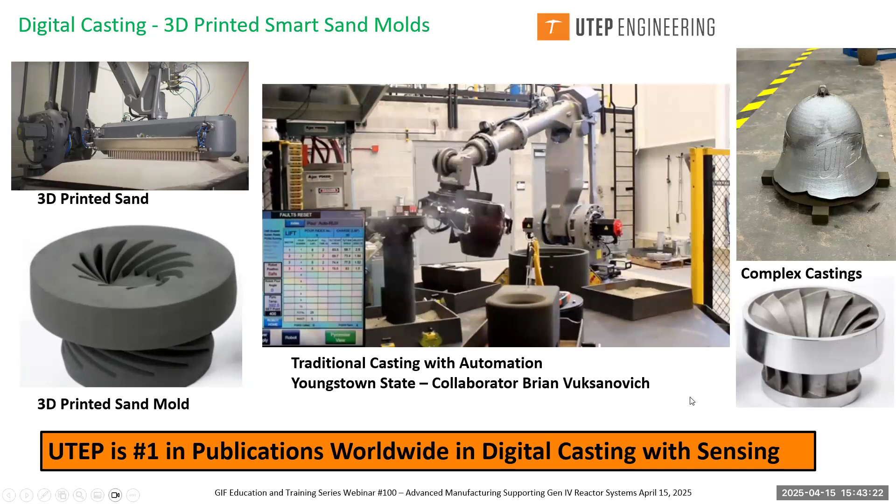Something we might not have thought about is digital casting, 3D printed smart sand cast molds. That's how you can combine traditional casting with automation. It's in collaboration with another university, where you print your sand mold with your sensors in, and then you can develop your process parameters to produce complex castings ready for work. UTEP is really good at that work.

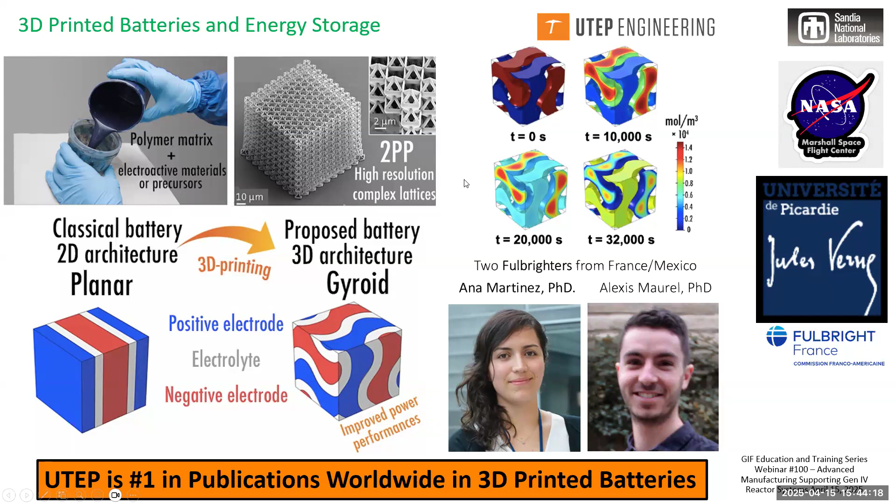On the wider perimeter, there's a lot of opportunity for lattice printing and a variety of applications for strength. In this case, they're using examples with batteries and energy storage, which is slightly off topic from direct nuclear energy, but it shows the possibility for a variety of lattice structures. There are various techniques for this architecture, and it's not only additive manufacturing, but also fused filament processes, etc. Don't limit yourself just because you don't have the equipment - there are multiple collaborations that can take place.

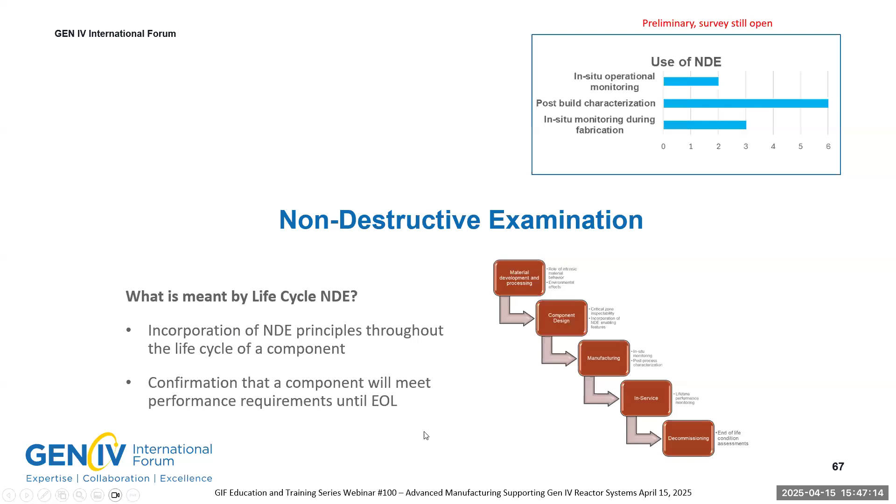For life cycle NDE, you need to develop and understand your non-destructive examination techniques and how they can help accelerate development - but not only that, also help during your in-service and decommissioning stages. I think I've got one or two slides here. There are still challenges for additively manufactured components specifically, and also for other advanced manufacturing components.

During your design process, you need to understand what your inspection regions are. Is it the weld versus the entire part? Is it volumetric or surface? Are you looking for defect structures? What is the critical flaw? Very similar to other techniques. However, because additive manufacturing microstructures and their behavior in operation are still fairly unknown or not well understood, this should be developed together with that.

There's also a lack of experience with these new in-service defect formations. In this next slide, I want to show that we can also indirectly leverage the relationship between unique ultrasonic properties of the material and the physical characteristics. So potentially, ideally, we can see how the property changes over time in service, if we develop it like that.

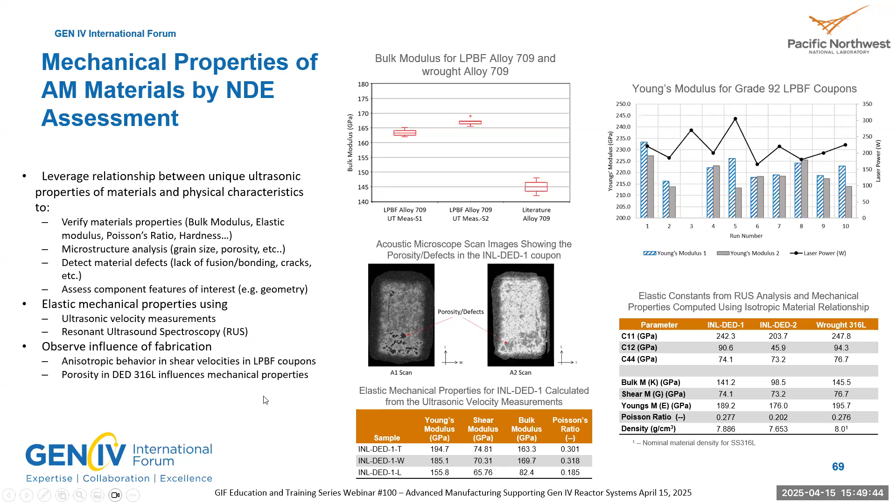Oh, okay, my apologies, I need to jump back. In two weeks' time, there's a non-destructive evaluation of advanced manufacturing components event at PNNL. Although it's a little bit late to register, it's still relevant to that.

Okay, and I know I'm taking quite a lot of time, but I'm getting so excited. Now, we all can dream about demonstration and deployment, but if we don't have a supply chain, we can't do this. So similar to the NRC or regulatory instances, the developers and the supply chain need to work together for the full life cycle.

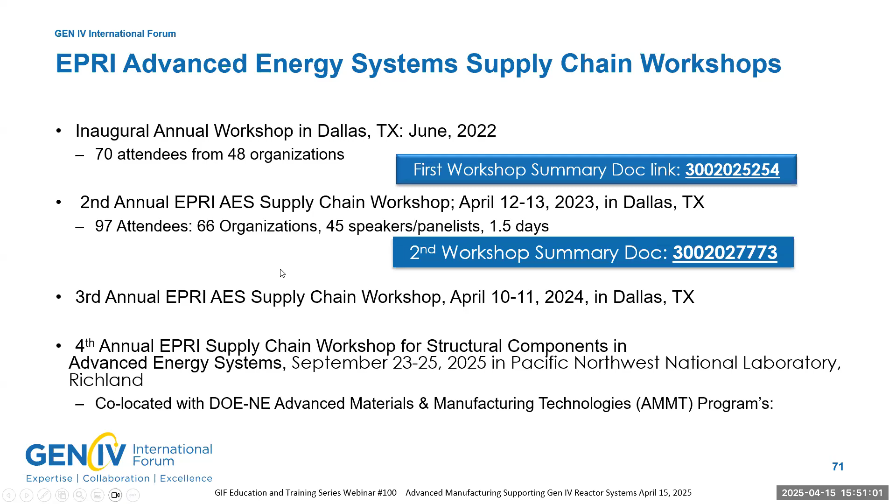EPRI has held, at the moment, 3 supply chain workshops, each with a different objective. The one about a year ago, and then the 4th one planned for September, which will be co-located with our AMMT program. There are 2 reports already available for you to look at. However, I would like to show here from the first workshop, which is obviously extremely relevant.

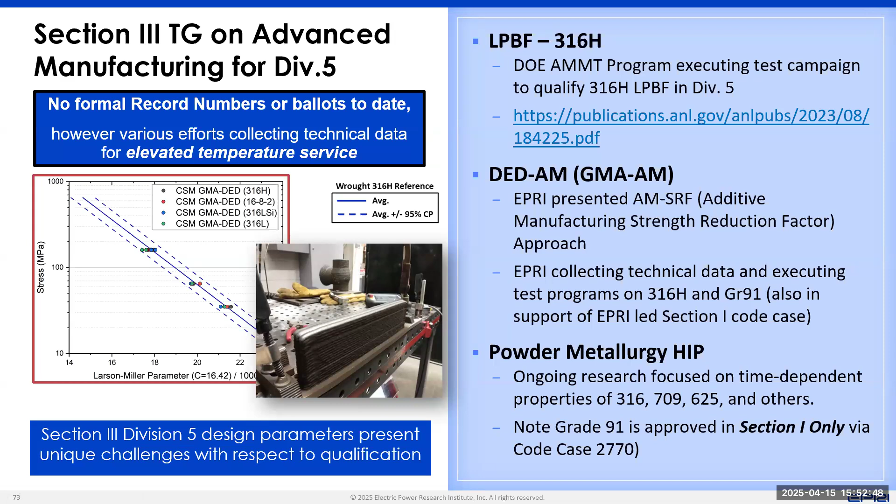I do not have time to go through all this ASME code work that is going on, but there is work currently on laser powder bed fusion of 316H, which is the DOE AMMT program's executing testing campaign for high temperature 316H laser powder bed fusion. There's some reference there, and then there's also DED and powder metallurgy. It is quite involved, and obviously all the stakeholders need to go together.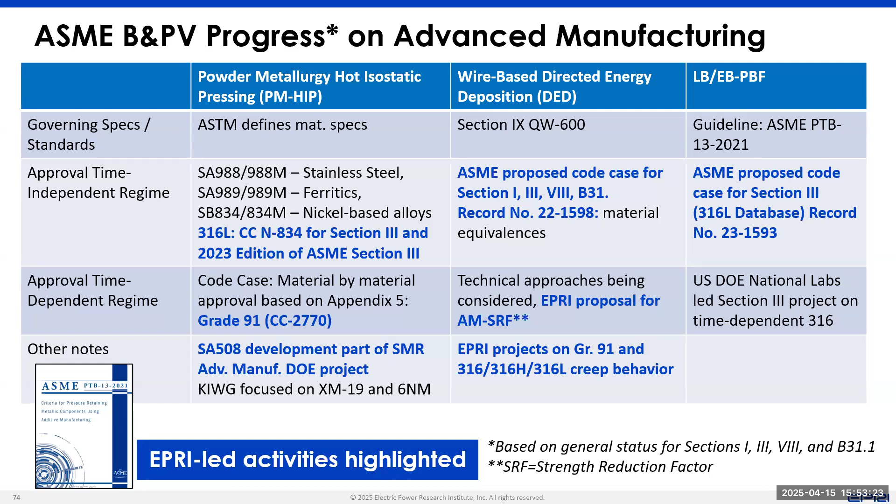Here is some work that Mark Albert prepared for us - thank you, Mark - showing where we stand with PM-HIP, DED, and powder bed fusion, and some of the guidelines and specifications. This is an excellent slide to keep for yourself, to understand where you are with your codes.

Now, last but not least, I want to provide some information about the US program. I do know there are many international programs as well globally, but this is my home program, and I would like to share it. I want to highlight that there is a website describing the program, which also contains links to all our reports and roadmaps going forward.

Here is our contact team under the leadership of Meimei Li, our National Technical Director, and Dirk Cairns-Gallimore, our Federal Program Manager. Really, it is to accelerate the development, qualification, demonstration, and deployment of advanced materials and manufacturing in support of US leadership in a broad range of nuclear energy applications.

So you can see that we all globally have the same mission, vision, and goals, actually. And if I can jump to one of the last goals here - accelerate commercialization through technology maturation - it takes a village to build a reactor and to commercialize it, and we can each contribute.

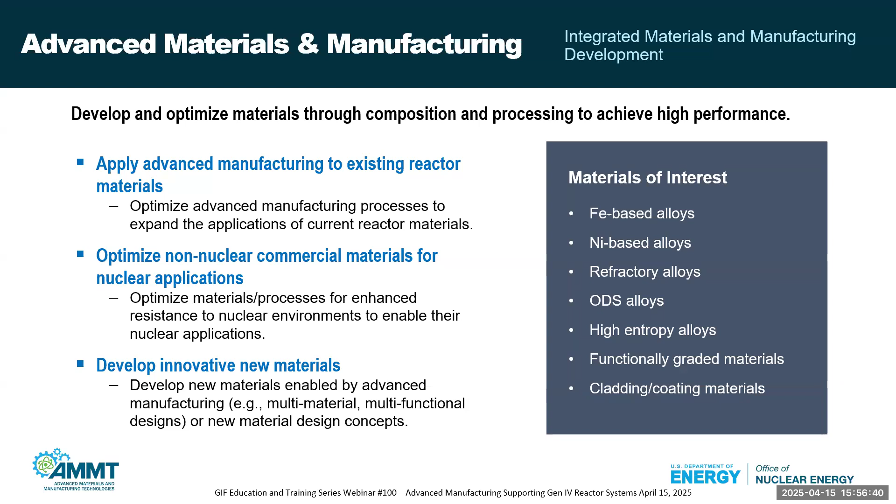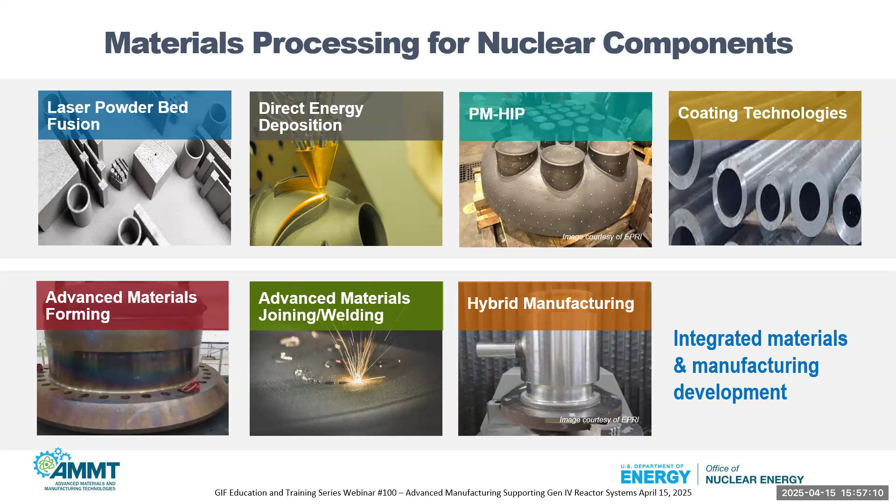However, we must understand that we are not developing a material separately from the manufacturing process, and therefore we need to understand integrated materials and manufacturing development. These are the classes of manufacturing processes our program wants to focus on. However, you can imagine that under coating technologies, forming processes, welding, and hybrid manufacturing, there is an enormous amount of work. Now, with the current - I'm jumping the gun here.

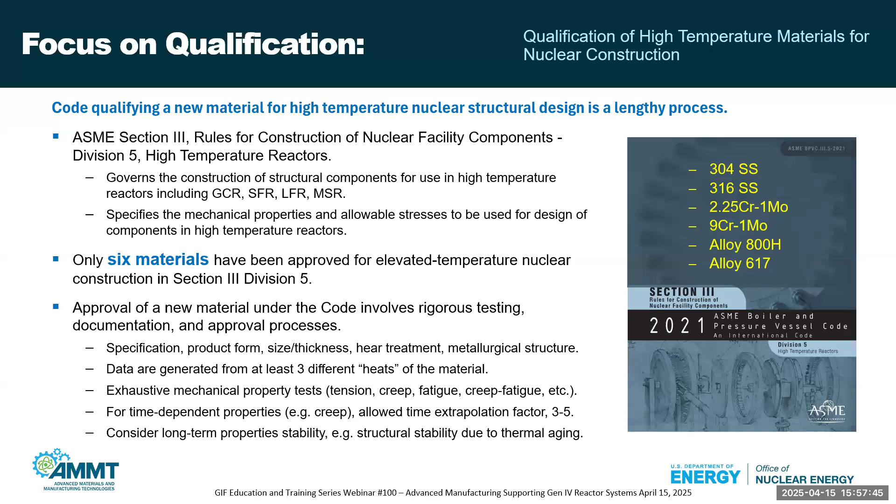I should have had the ASME slide after this one. But currently there are only 6 materials approved for elevated temperature nuclear construction, and not necessarily for advanced manufactured processes, which derive a new material itself. So it's timely to do this work on material manufacturing domain qualification, which includes irradiation effects and corrosion effects.

The ASME code does not provide methods for those two, however, the NRC issued a material compatibility for non-light water reactor draft interim staff guidance, and I urge you to have a look at that document.

So why do we focus, for the current immediate, on additive manufacturing processes? It is because it creates a spatially heterogeneous microstructure, unlike traditional manufacturing, it creates geometric forms simultaneously with the material. It's a highly localized process, so we may have spatial variations. Do we understand how those spatial variations impact the bulk properties of the material itself?

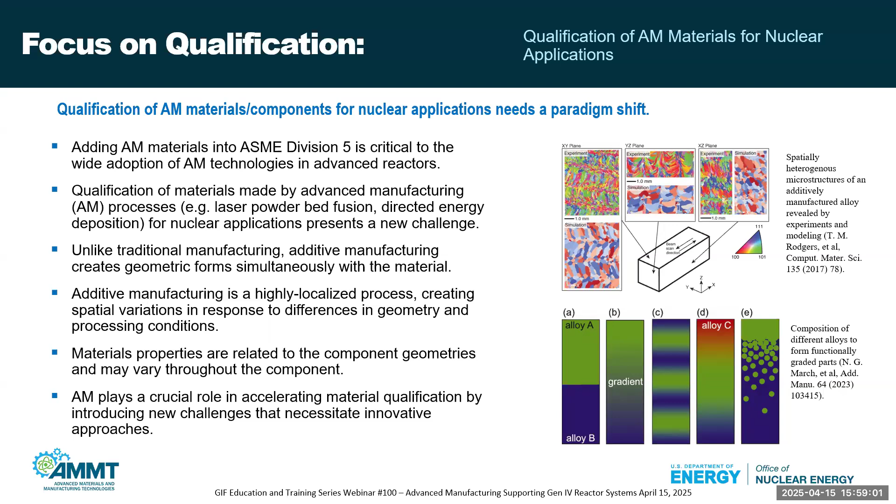We have focused on this, following a science-based engineering approach, combining scientific understanding with engineering data, important to develop our process-structure-property-performance based qualification work.

We are demonstrating this using integrated experimental modeling and data-driven tools, using in situ process monitoring and digital data in the qualification process.

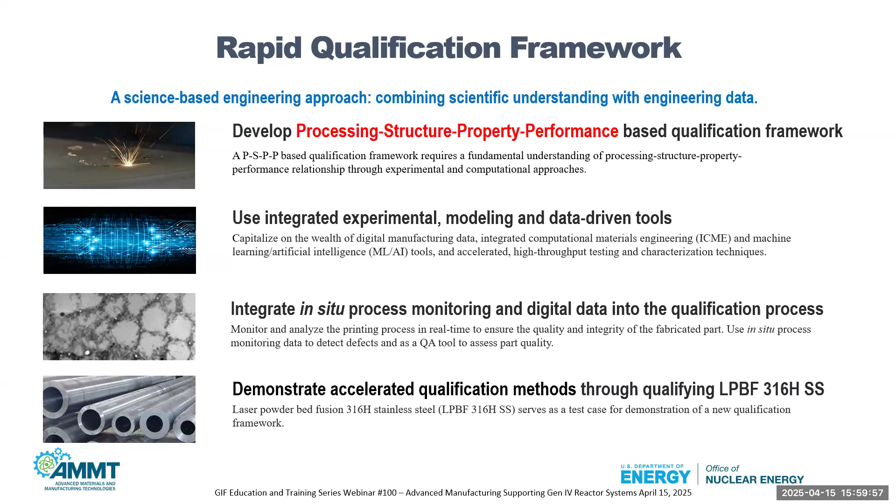We are demonstrating these accelerated qualification methods through qualifying laser powder bed fusion 316H stainless steel, as this is one of the materials that most of our industry partners indicate their first-of-a-kind material will need to be in.

Our aim is in 3 years we will demonstrate, and we are aiming, not just hoping, in 5 years for digital-aided qualification, and in 10 years we would have AI-based design control very much there. It's included in our roadmaps as well.

There are performance evaluations currently planned for neutron irradiation, both in HFIR at Oak Ridge and ATR at INL, where we focus on 316H wrought as well as wrought 709 and 316L, as well as in other programs or NSUF funded work, with smaller projects going on, and other programs as well.

In the ATR, we are targeting the cycle coming soon, and we are in the planning for alloy 709 - the plan is already developed.

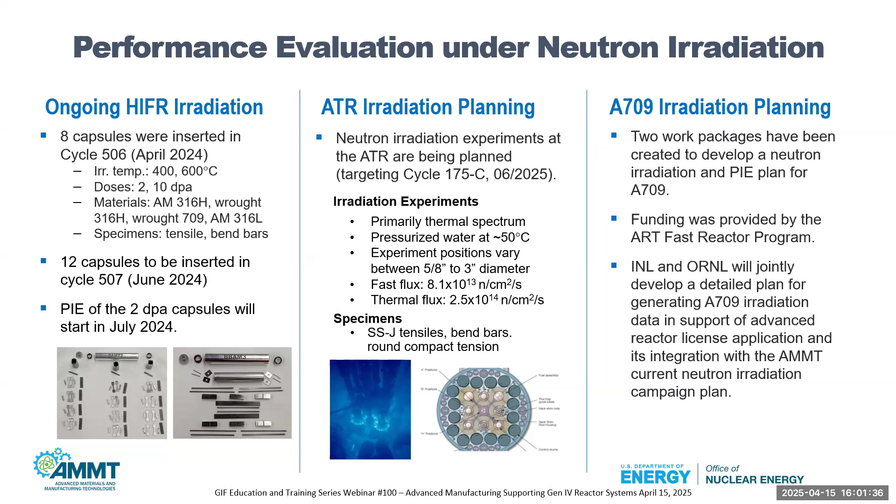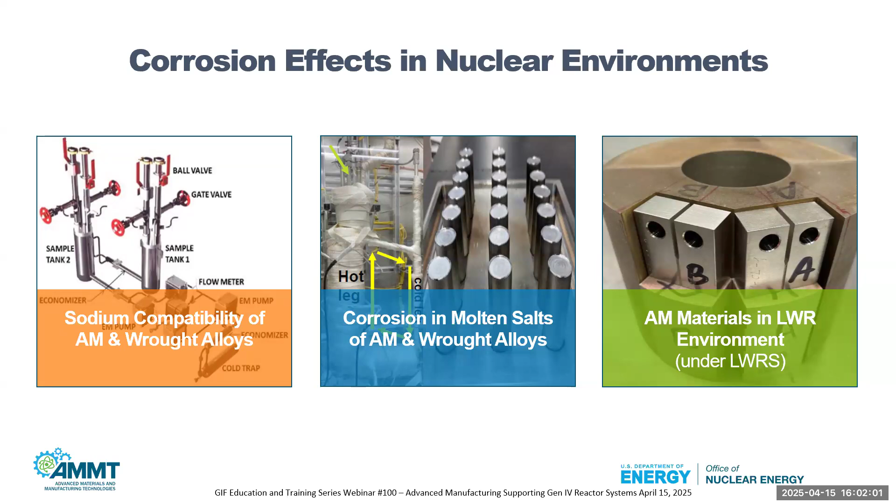Corrosion effects - with a variety of developers, we must test the material under various conditions. Our sister program in the light water reactor has additive manufactured materials being tested under a different program, but we have lessons there that we can learn.

Technology maturation - the goal is really to advance our technology by increasing the TRL level so that it can be adopted. To summarize, it's really to do component fabrication, to demonstrate the fabrication feasibility of the reactor component using new material or technologies, and then to evaluate the component in relevant or simulated reactor environments.

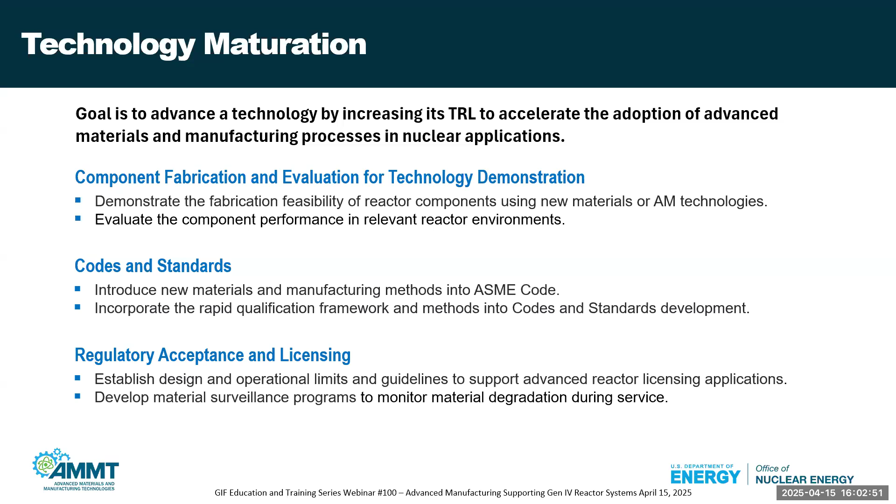Codes and standards - how do we accelerate this new material and manufacturing within the ASME code? And then how do we get regulatory acceptance and licensing, and monitor the work there?

So final remarks - we must work on providing industry solutions. There is no recipe for all. So know your customer, know your end purpose. Why do you want to do that? What requirements should it be? And know your processes. Each of us is contributing a puzzle piece in this bigger puzzle.

So let us work together for full integration and to gain momentum to accelerate the deployments. And how do we do it? By collaboration and sharing of data. We need to know what qualification technologies and acceleration processes are there as well.

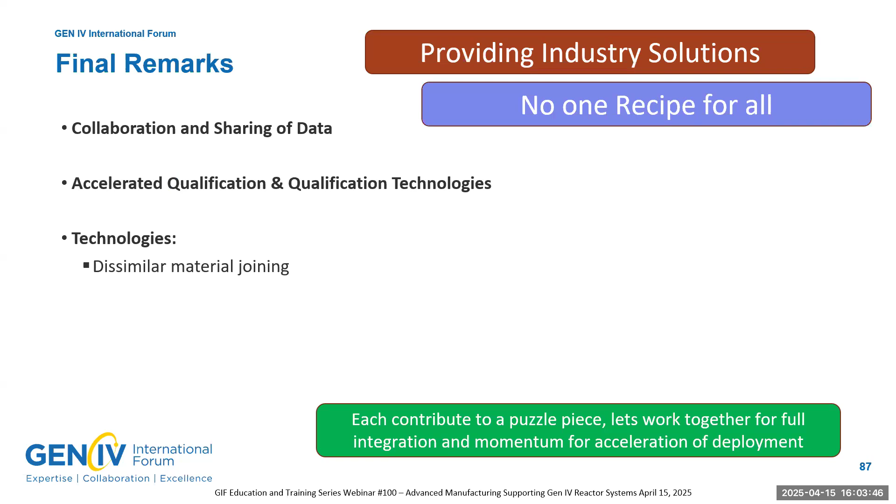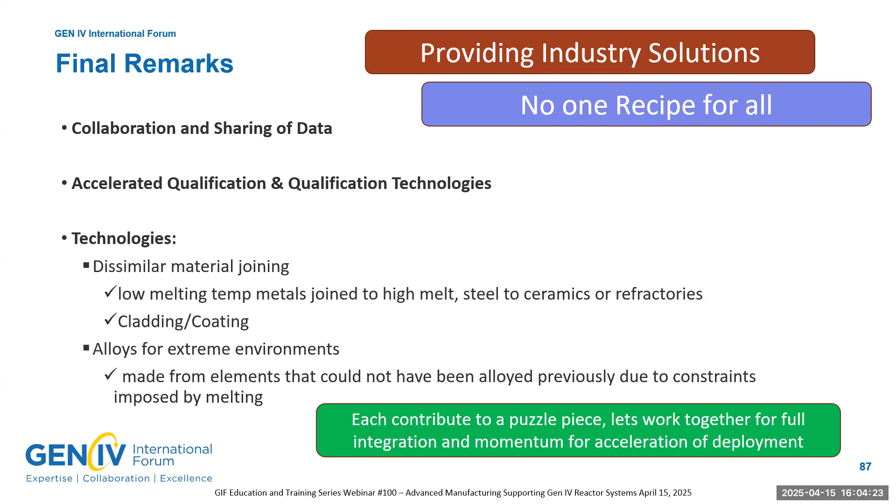There are some key technologies that we can immediately focus on that will have an enormous effect on multiple reactor types, according to my view, and that is dissimilar joining. Our industry partners told us that for the past 6 years, let us do that. Cladding and coatings for extreme environments, and for the future, is the alloy that we currently have the real one, or are we limiting ourselves with our knowledge of conventional manufacturing processes? Let us think a little bit further on that.

And with that, I say thank you very much, Patricia. I know I have been extremely long. Over to you. Thank you.

Thank you very much for this presentation that is packed with an impressive amount of information, and that illustrates how deep we can go during GIF webinars.